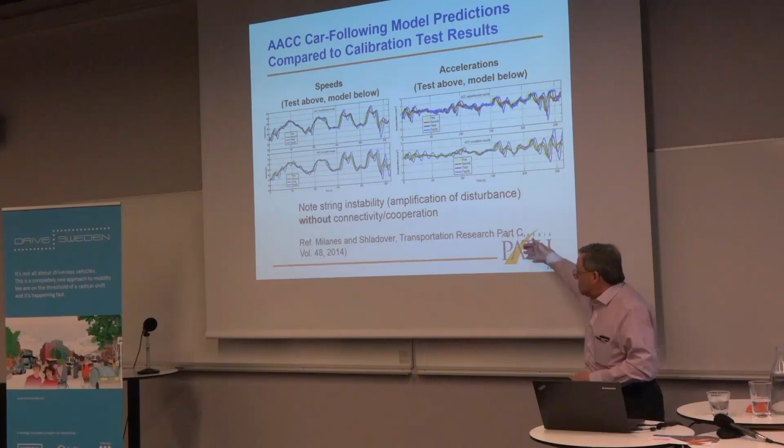This is because of the car following dynamics of the adaptive cruise control system. The fact that it takes the sensor a while to recognize what's going on, and the logic is built in such a way to smooth out the driving, so we get a significantly delayed response. This is a traffic shock wave in the making. In fact, when I rode in that fourth vehicle, I said I'd turn that system off. Any sensible driver would have turned that system off instead of continuing to use it, because the behavior was so bad. So this is a string instability, and by the way, this was published back in 2014, the paper in which we derived the model from the test data.

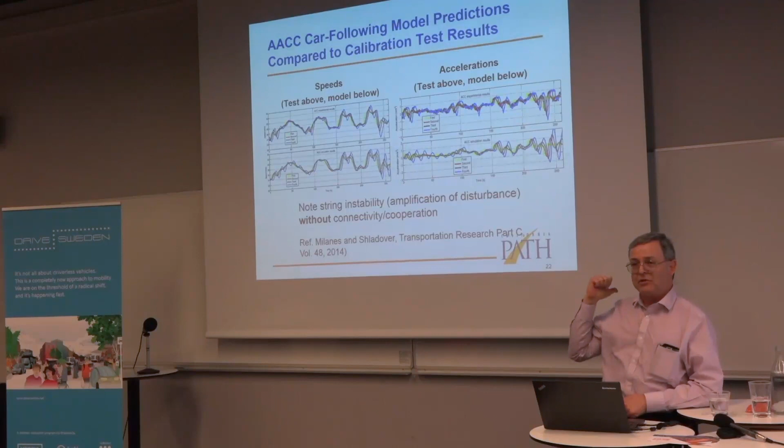So we take the model that's represented in the lower part of the plots, and we put that into the traffic simulations. Now, we took the same test vehicles and made a cooperative ACC out of it. So we added the vehicle-vehicle communication. We redesigned the controller to make use of that information. And now you can see all the vehicles following the same speed profile. The acceleration's very well behaved. So we put the cooperation on, we've eliminated that traffic flow instability. Without it, it's traffic flow unstable. It's going to be a lot worse than with human drivers.

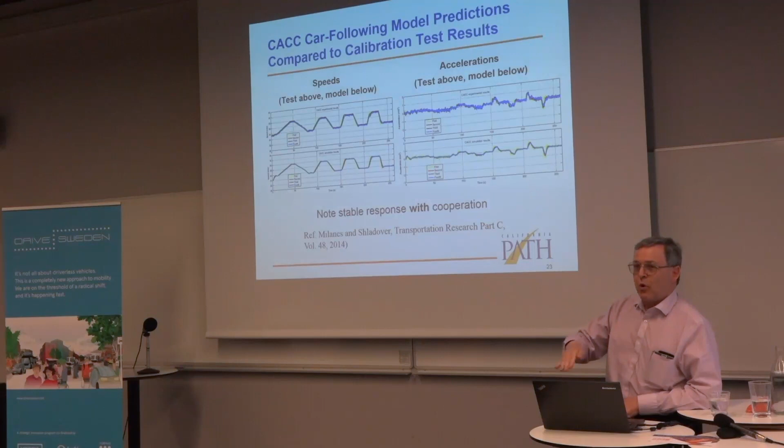We have to study those simulations very carefully. I'm going to show the animation here of a merge junction. The upper one here is with all manual driving. So this is just the basic driver model. The colors correspond to the speeds. So green is basically free flow speed, and then as it slows down, it goes to orange and yellow and red.

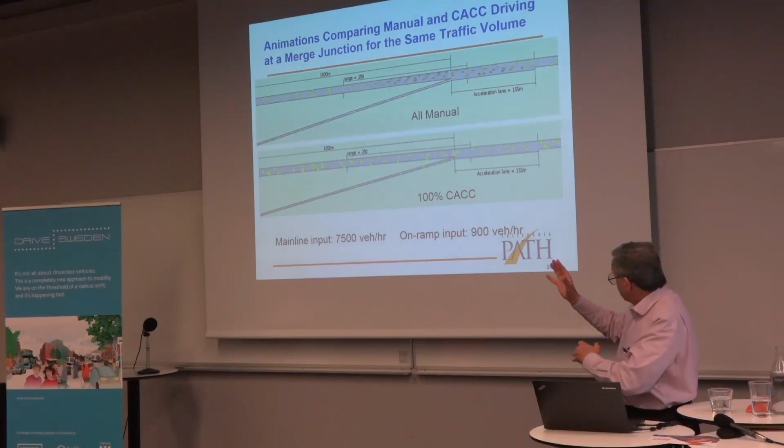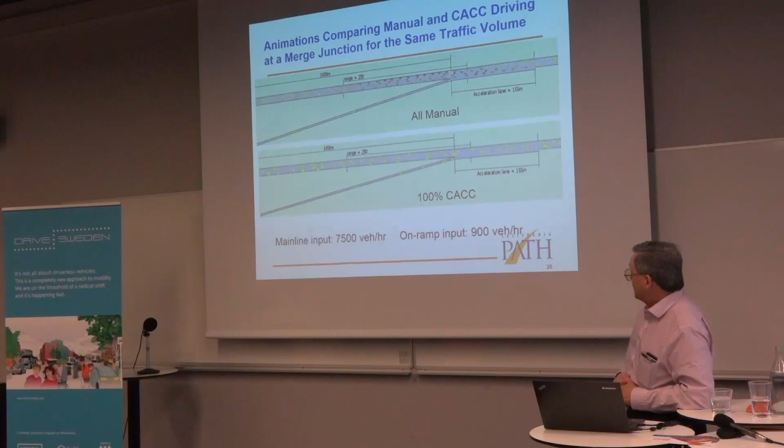Drivers in the right-hand lane approaching that merge are going to start moving to the left to avoid the conflicts with the entering traffic. But there's a great deal of complexity embedded inside that simulation to represent both the car following and the lane changing decision making by those drivers. This took a year and a half, 2 years with a couple of postdocs working full time to get to the point of having a simulation that actually predicts this sort of behavior in a realistic way.

We have to get to that point before we can start looking at what happens when we add adaptive cruise control or cooperative adaptive cruise control. So here we've got all the vehicles equipped for cooperative ACC driving, and we're adding the same volume of on-ramp traffic. And we're only going to see a very slight slowdown in this case, because with the cooperative ACC, we're able to get vehicles closer together. We're able to damp out some of the vehicle following disturbances.

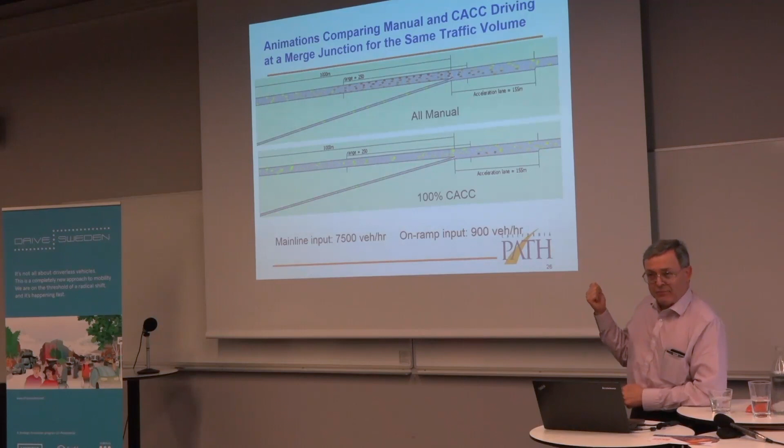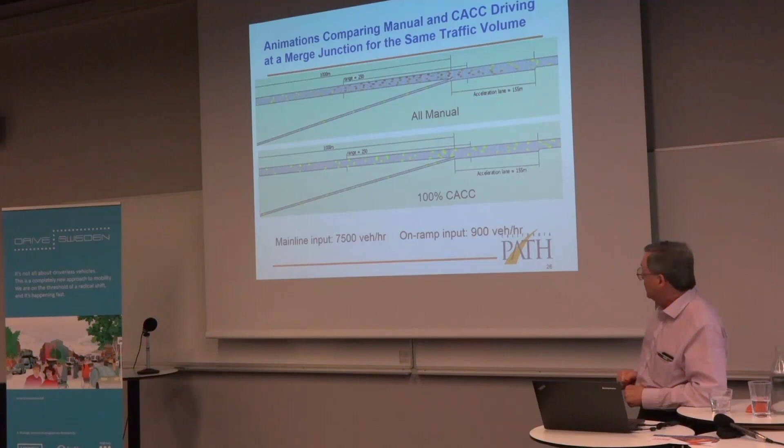And here you see they're still almost all in green, a little bit of yellow and orange right at the lane changing point where the entering traffic gets into the mainline traffic stream, but those disturbances go away pretty quickly. And that's why we saw the higher volumes of traffic that we could get with cooperative ACC. If we tried this with the adaptive cruise control, this would have gone red almost instantly. So that's why I'm not showing an animation with the regular adaptive cruise control. We would have had to ramp the traffic volume down in order for it to be able to continue if we were doing regular ACC.

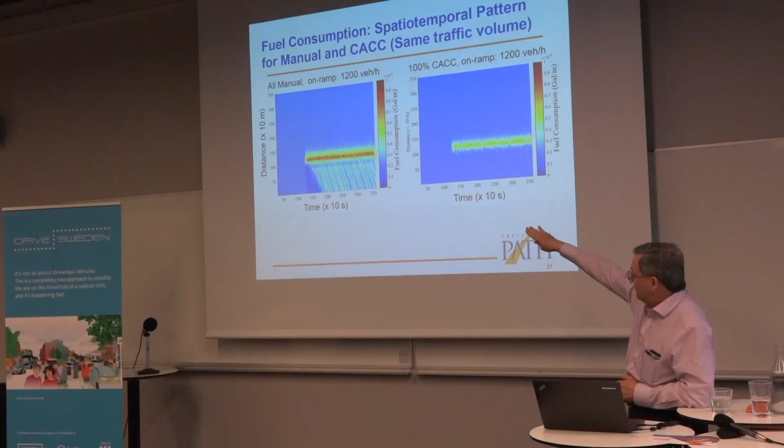And on the left side, you can see with all manual driving, we've got some slowdowns and some disturbances that are causing increased fuel consumption. On the right side with the cooperative ACC, there's just a little bit of increased fuel consumption right at the merge location where we've got some lane changing happening. Same traffic volume in both cases.

We also wanted to look at traffic along a real corridor. So the traffic flow model was calibrated for a freeway corridor approaching downtown Sacramento, California, where we were able to get some pretty good data. And here we're going to see the plots for 6 different levels of cooperative ACC market penetration. This represents the morning period from 4 a.m. to 12 noon. So the morning commute peak is the part where we see the colors changing.

This upper left one is today's condition, the baseline condition with all manual driving, and then we've added 20% increments of cooperative ACC. Well, the first 20% of cooperative ACC actually makes things a little bit worse, and that's because of that low market penetration. They can't make use of the cooperative capability.

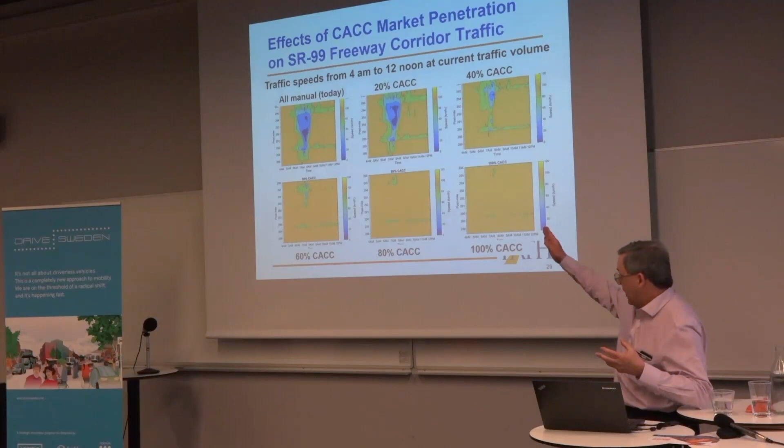Most of those vehicles are operating in a conventional adaptive cruise control mode because they don't have a cooperating vehicle right in front of them. By the time we get to 40% though, the congestion is significantly reduced, and then you see we get to 60, 80, and 100%, the congestion is pretty much gone away. So this shows how having that cooperative capability with the automation can help us relieve the traffic congestion in a real freeway corridor.

So I wanted to switch from some of those traffic impacts to some of the technical challenges. And why is this going to take a while to get to the higher levels of automation? I'm going to begin with the perception technology challenges. Well, in order to have that vehicle drive out there in mixed traffic, it's got to be able to perceive any relevant object within the path of the vehicle, because the vehicle is going to have to make driving decisions based on that. It doesn't only need to perceive what the objects are, but it needs to be able to predict what the future motions of those objects are.

There's a big difference between a pedestrian standing on the side of the road and a pedestrian stepping out into the path of the vehicle. So you have to add perception plus prediction in order to have a usable system. And that means you've got to deal with vehicles, pedestrians, bicyclists, animals, any moving objects that might get into the path of the vehicle. And I think it's pretty clear it's got to at least match the perception capabilities of an experienced human driver under all of the environmental conditions within its operational design domain.

So this is where that operational design domain comes back, because now we have to say, what is the set of conditions in which we can prove that that automation system is at least as good as a human driver? It's not going to be true under all conditions. It'll be true under some limited set of conditions. And now the key thing is, how limited is that set of conditions?

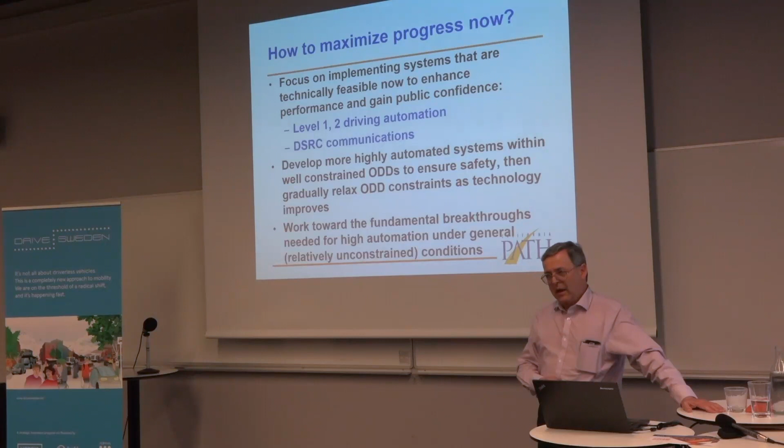And I really want to see some breakthroughs in the software engineering methodologies. I mean, the way we create software these days is sort of like the way we build houses, it's just way too labor intensive and primitive. We need some more intelligent ways of developing the software so that we can get to a low enough rate of software faults that we can actually get to some of those safety improvements that we're hoping to achieve.

It's because you want to reduce the rate of faults in the software, thereby using more complex software? Yes. Well, I didn't say more complex. That's different, right. I'm just saying methods of developing the software so that you have a better chance of making it safe and of eliminating the bugs. And the bugs can be a different type, not just coding bugs, but specification errors.

How do you develop the comprehensive specification for the software that's going to do driving under a very diverse set of conditions? What are the things that software needs to do? And how do you define that in a comprehensive enough way that you're not going to leave out something important, but in a simple enough way that it's actually feasible to do it? And people have been wrestling with software safety issues for decades.

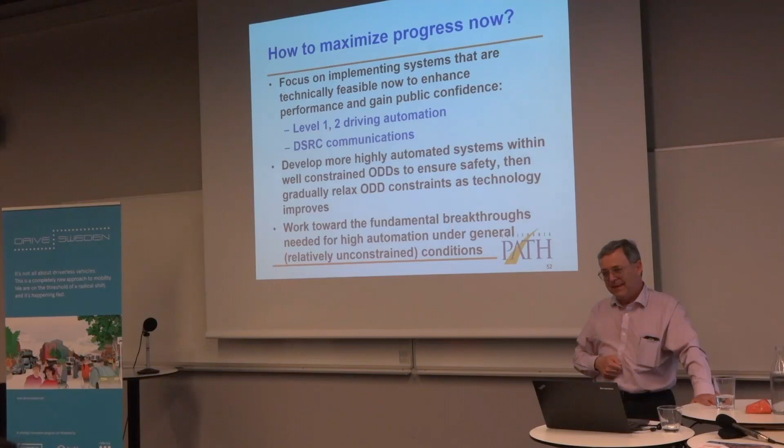No, and I think that's actually one that's going to be really interesting in terms of how much there are going to be national differences. When you have different value systems in different countries, different societies, how's that going to play out? I don't know. It's certainly going to make it more difficult for people in the industry if the vehicles have to be designed differently based on different value systems in different parts of the world.

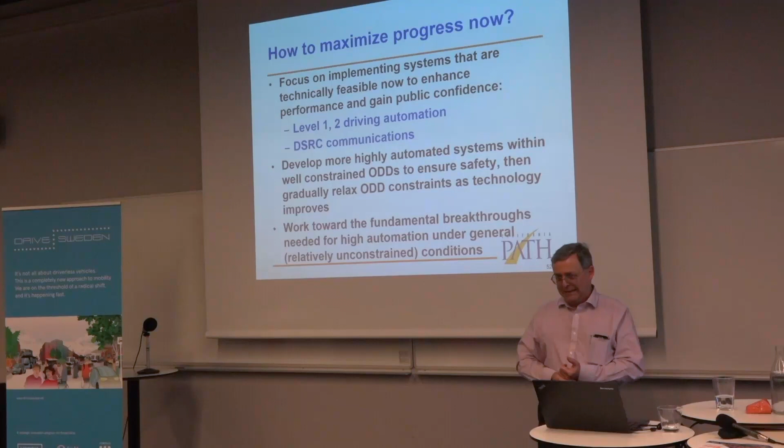But I can cite an example from a country that I won't name that is planning some fairly aggressive demonstrations of some automation technologies, getting them out on the road quickly. And I asked the person, well, how are you going to deal with the adverse public reaction if somebody gets killed by one of those vehicles? And the answer was, you don't understand. We control the media. The story will never get out there. Oh, okay, that's different from the paradigm I'm accustomed to.

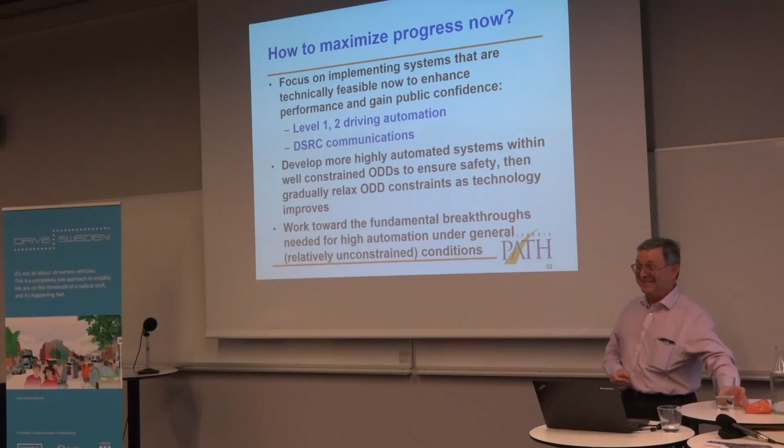I'm going to exercise my moderator privileges by asking the last question here, because we're going to close short. Combining what you showed in your presentation, you mentioned the set of sensors required to be successful, and that included the wireless communication. At the same time, you mentioned that Waymo is ahead in this game, but to my knowledge, they're not getting into that application of wireless. That's right. Yeah.

And actually, I had that discussion with them about 5 years ago because they're doing their testing very close to a location that we've got instrumented with a bunch of wireless communication, where we're broadcasting the traffic signal information. I said, wouldn't you guys love to use our traffic signal data? We're broadcasting it all the time. It's there for you to use. And there was a two-part answer. The first part of the answer is that would be great.

That helps solve one of our most difficult problems, because they said when they approach an intersection that their map database tells them has a traffic signal, they need to command the vehicle to stop unless they can verify they've got a green signal. And under some lighting conditions, that's not so easy to do because they're dependent on a video imaging system to do that. So they said, yeah, that would be great.

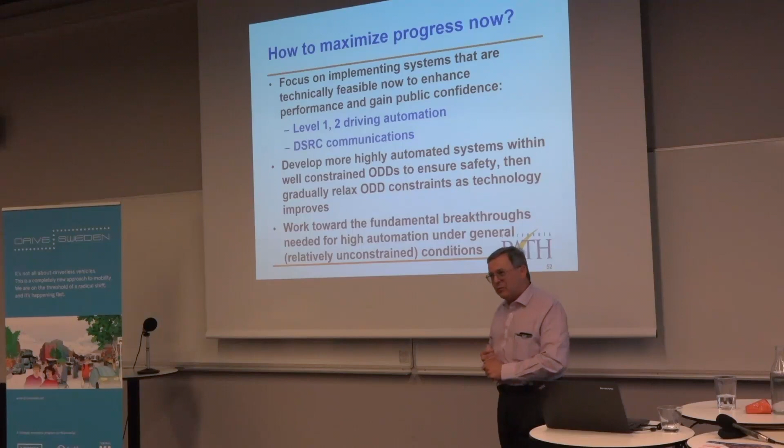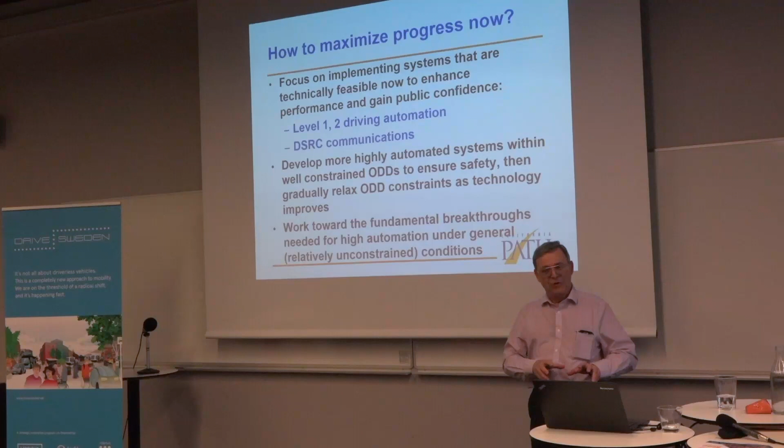But they said, on the other hand, we've got to develop something that we can use even when we don't have the infrastructure equipped with the communication technology. We want to be able to use it under a wider range of conditions. So that's the trade-off in having the communication. And I suspect to get to the higher levels of automation without creating traffic problems, it's going to be necessary to have the communications. Now that could be where there's a stronger motivation for the public authorities to equip their infrastructure with the communication technology as well.